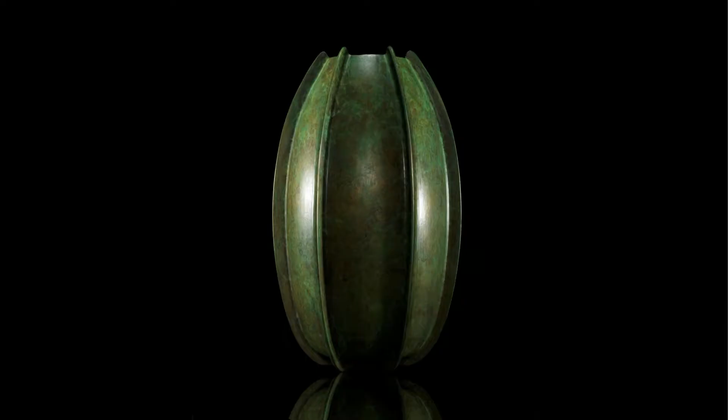This is also interesting, I did a series of these vases. This is cast in bronze. The original ones I did, the original piece was made out of wood and then it was used as a mold and it was cast. And then the next one has a twisted design. The ribs on it kind of spiral around it. And in that one, what was interesting was that I used a 3D print as the mold for casting. So my plastic became the lost wax.

Unfortunately, it was environmentally idiotic. I used ABS. My friend who runs the foundry was kind enough to do it just once and told me enough of this. And Bruce is going to talk more about it, we've collaborated on this for a number of years, and Bruce has taken it to an entirely different level. And I'm really excited about turning it into something that's really useful and environmentally friendly again.

And what's interesting about this range of work, all of the early work, including the boats, were all done in analog fashion. There's not a digital thing involved. There's no digital tools in the design, and there's certainly no digital tools in the fabrication. All the later ones go through this period of exploration of starting to use digital tools, and then things like the go-kart are this weird mix of analog and digital, which I think really is the future, where there is no real distinction, and a digital tool is just a tool.

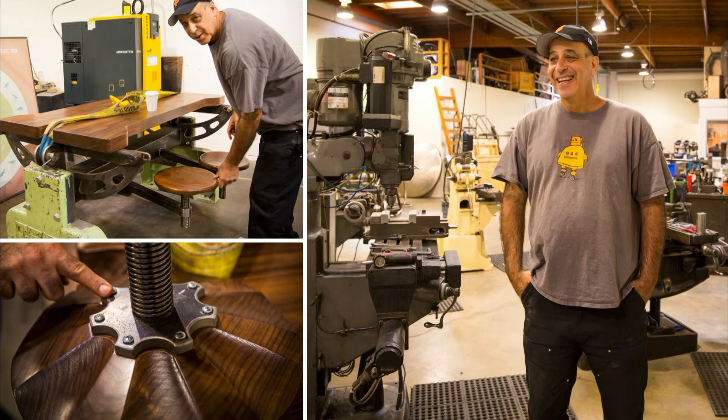So when I'm not being CEO, you can find me in one of my shops. This is my shop. This is the metal shop. I'm busy building shop furniture, which is just taking old machine castings and combining it with new stuff. There's nothing like building furniture with 1.5-inch Acme threads. I have not found a piece of furniture that would not benefit from a 1.5-inch Acme thread.

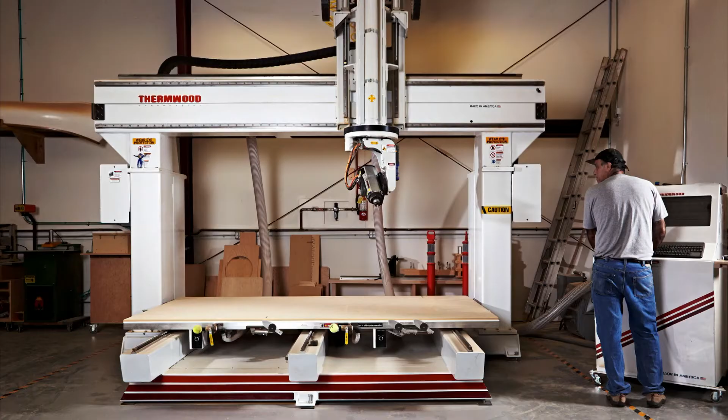And this is me in my wood shop along with my woodworking robot, who, unfortunately, I thought was going to save me tremendous amounts of time. There's two funny parts of it that are somewhat ironic. One is when you have one of these big machines that you think is going to save you all this time, the first thing you do is you stand in front of it all day long just watching it do work. So you go from actually doing work to just standing there, and then when it's actually done, you have a ton of stuff left to sand. So I thought it would save me work. It has created way more work for me than I ever imagined.

So let me move on to really what the theme of the conference is, with this background of what I like to make, which is all about capturing, computing, and creating. And let me show you some of the capture stuff. There's so many people today who have already done a great job, and many more over the next day and a half who describe this act of capture. But I chose 3 different examples that come from our customers and partners doing interesting and representative work in terms of capture. So here's the first one.

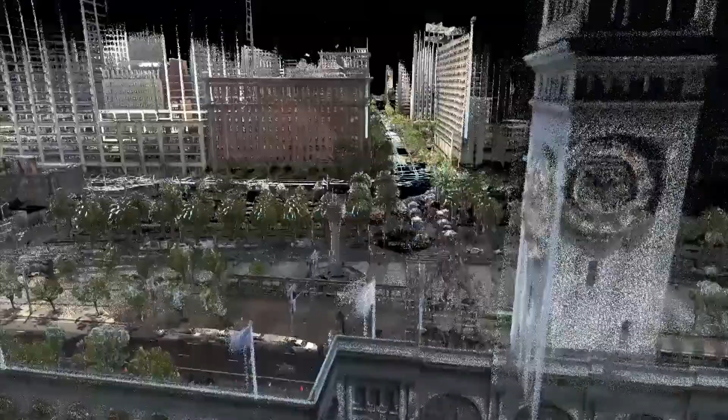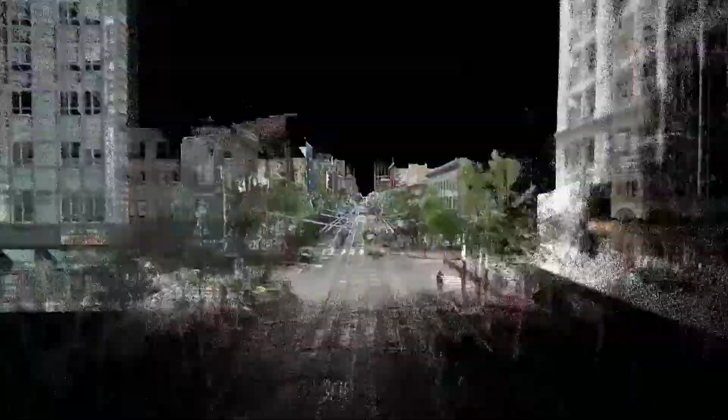So this is a capture of Market Street in San Francisco. I mean, from where we've come from, where we used to get thousands of points, tens of thousands of points, to be able to capture this, there's not a photograph in there, that is entirely a point cloud that's captured. And we're going to hear a little bit more about this project today. But I think it's kind of amazing. And in some ways, it speaks to this thing of we're going to be able to capture tremendous amounts of data. The real question is, what are we going to be able to do with all of this data?

Here's a second one that I think is really exciting. So this is Avatar. This is Jim Cameron making Avatar. What people may not realize about this is every bit of motion for the movie was captured. So this is the first feature-length movie in which every bit of motion was captured. And so it has a really different dynamic than what usually goes on in capture. Most of us are spending all of the time trying to capture the geometry and the topology of what we have. This one instead says, I already have the geometry and the topology. It's the 11-foot blue people. What I need to do is get realistic motion.

And so what they were able to do was capture everything, whether it was a horse, whether it was a person, or in many cases, really low tech, like the flying spaceships. They actually made them out of wireframes of hangers. And they just moved them around and took the motion of that and turned that into the movie. So a really interesting high-tech, low-tech combination.

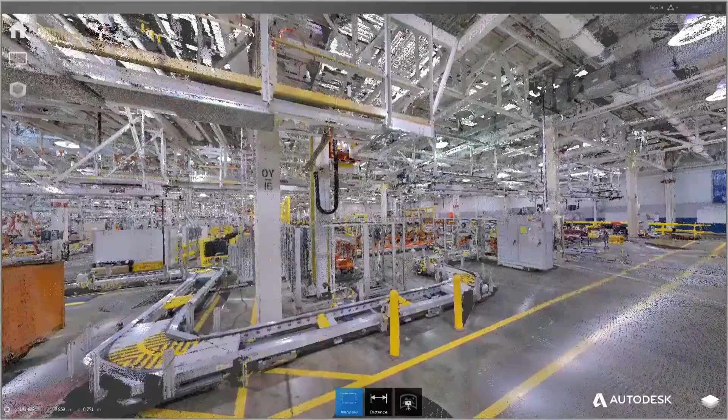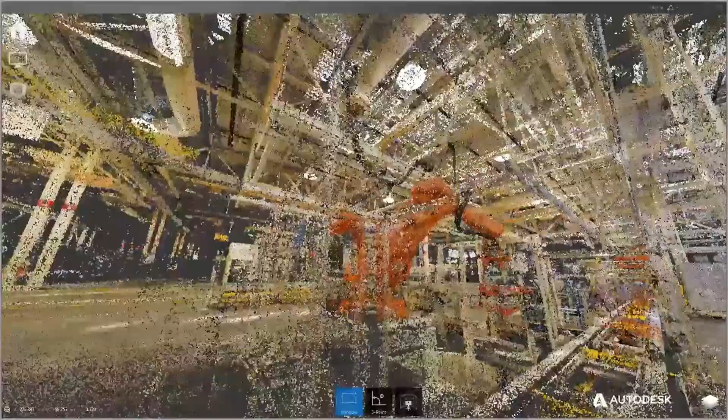Okay, we'll ignore that. Here's another example that you can see a lot of. This is a factory. So three different settings: one in terms of media and entertainment, one in terms of a factory, the other is the built environment. All really interesting places where there's a lot of data being captured, and we do have to figure out how to compute it.

And if you look at the Avatar one, that was the one that was most ready to plug and play in terms of they were able to turn it into a computable model. And I think that's really the important thing: how do you take this data and be able to compute on it? Just visualizing it is interesting. It's not enough. The other thing about it that I think is particularly interesting, it starts leading to this idea of different kinds of representations of the information inside the computer.

In many cases, we've historically worked with analytical surfaces. But as we start gathering point clouds, it's going to become more realistic. And discrete forms of data in terms of point clouds or meshes are going to become more reasonable. And in the end, we will be able to do many of the things that people think are unimaginable, like drive CNC tools, even off data like this that's actually discretized as opposed to continuous data.

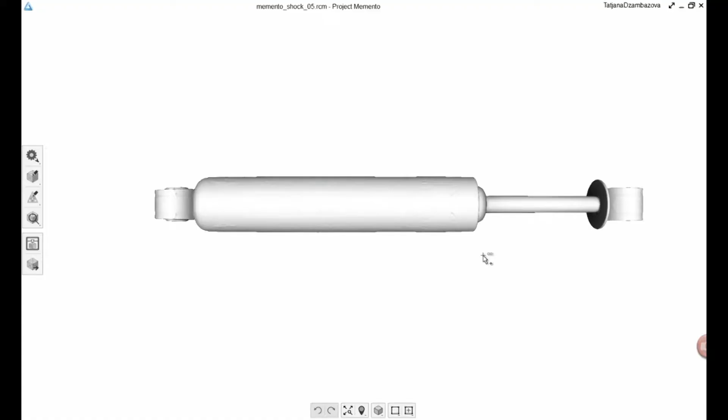Okay, so let's just look at the compute. So here's an example. This is a classic, I think Stuart talked about this this morning. Many people have fancy names for it. I still see it as reverse engineering. You have a part that already exists in the world. This is a new product that we just brought out called Fusion, a cloud-based CAD system. What was important about it is that you can start taking in data that already exists in the world, and you can bring in this data and transform it through different data representations.

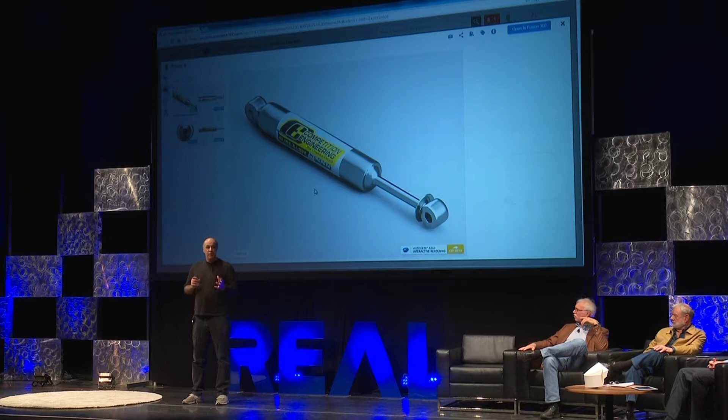So while people talked about, and Stuart did as well this morning, these workflows, I actually think the thing that's getting in the way of these tools being really useful is that the workflows are very much too painful. So while the point tools are good in and of themselves, the place where the pain enters the process is moving from one to the other. As he said, I moved it 11 times in an hour. My head hurts from the idea of moving between tools 11 times in an hour.

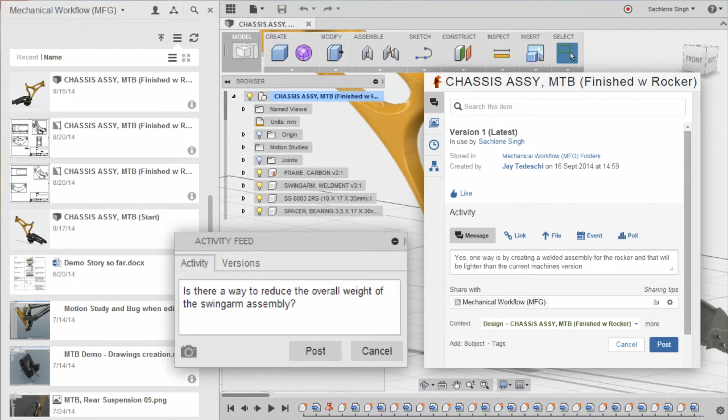And so we worked hard on trying to build a tool that is built around the idea of, I'm going to work together with other people. So two important considerations. One, I'm going to work with other people, we're going to collaborate, and I'm going to know what's going on. And the second thing is I can go all the way from ideation to fabrication in the tool. And here we show it runs on all kinds of Macs and PCs. But in the end you can take something that comes in as a point cloud and eventually fabricate it in a CAM tool.

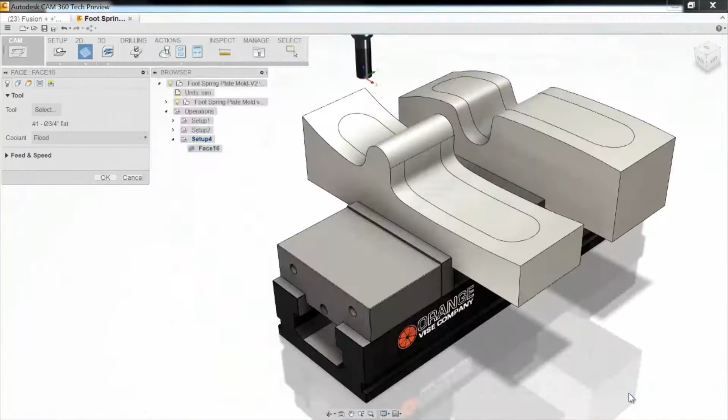And so we're really interested in trying to avoid these places where the data just kind of falls into a dark hole. And what bothers me most about it is the difficulty in going back and forth. And that idea of iteration seems so important to me in the way that you make things, that you need to do iteration all the time. And when the tools prevent it, I think it prevents you from making the best things possible.

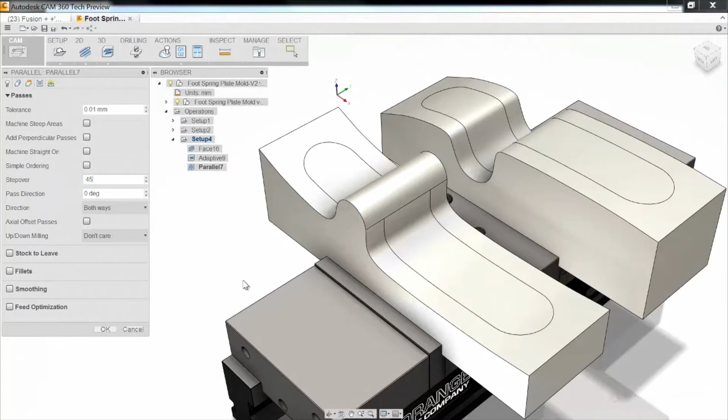Let me move on to one other thing that has me particularly interested, and this is this idea of generative design. And it's different than what we see going on in the world where we're going to capture something. This is a different idea which starts with the idea that computing is virtually free and virtually infinite. And if you had all the computing in the world, how would you design and engineer things differently? That was the starting point for what we were thinking here. And at first we said, let's just test exhaustively. And that certainly yielded some results.

But then we said, what we really want to be doing, because in the world of CAD, computer-aided design, I would say in the 30 years that CAD has existed, the computer has barely ever aided in the design of anything. It's true. It started 30 years ago, and we did 2D documentation. We agreed upon a convention, and I made a blueprint, and I transferred it to you. Today, we do the same thing with 3D models.

We document our ideas. We do not design in these tools. And the idea is we need to reach the place where these tools actually help us. So here's this idea of generative design.

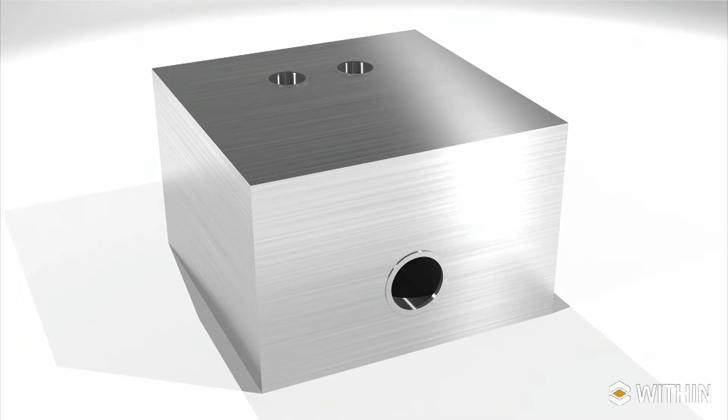So imagine we have something that fills a space envelope. And there are two fluids in it, and they're going to pass by each other, and there's thermodynamic requirements about exchanging heat. And all we're going to talk about is a high-level specification of what we want.

And now we're going to let the computer, and remember, we believe that computing is virtually free, so we're going to let it run for hours, thousands of hours, tens of thousands of hours. And there's the heat exchanger that the computer designed.

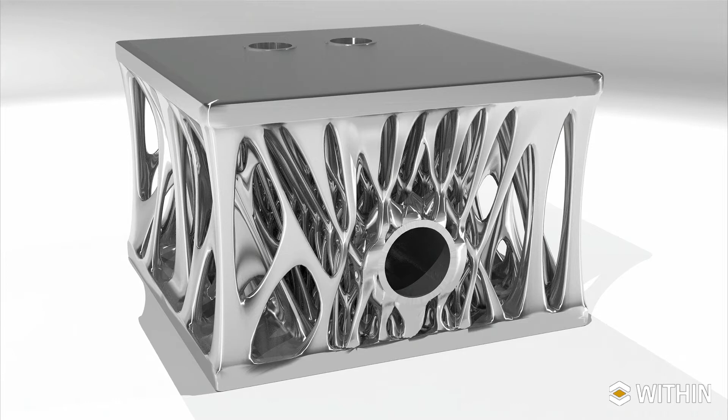So it's one of these interesting things. It makes a lot of designers, I'd say, almost angry, but I look at it as just another one of the tools. It's another technique that we have that will start getting at it. What's interesting about this design and several others like it, it explores the space in a way that guarantees you a near optimal solution.

As a matter of fact, we did another one for a part of an electric motorcycle. We were working on the swing arm, and we ran it through the same algorithm, and the result that comes out looks almost identical to a dog or a cat pelvis, except it has a hole on one side. And we say to ourselves, this has to be a bug in the algorithm. And it turns out, of course not.

Unlike a dog or a cat, the loading on a swing arm on a motorcycle is asymmetrical because the chain is on one side. And so it was interesting because when I went back and you go to Google and you look at the images of all the swing arms that have ever been designed for motorcycles, nobody ever picked up on this fact.

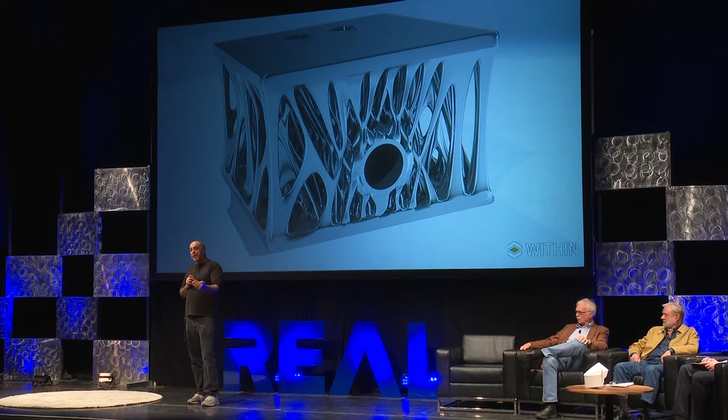So I think there are insights that we can learn, and we need to be a little less proud about letting computers start helping us design and engineer things better. Here's another example just like this.

This one is growing a structure, and this is for a hip cup. And the idea behind the hip cup was to make a structure in which the foam has pores that are pseudo-random in size. And the reason is that it's demonstrably better in terms of having the bone grow into it if it is pseudo-random as opposed to a regular structure.

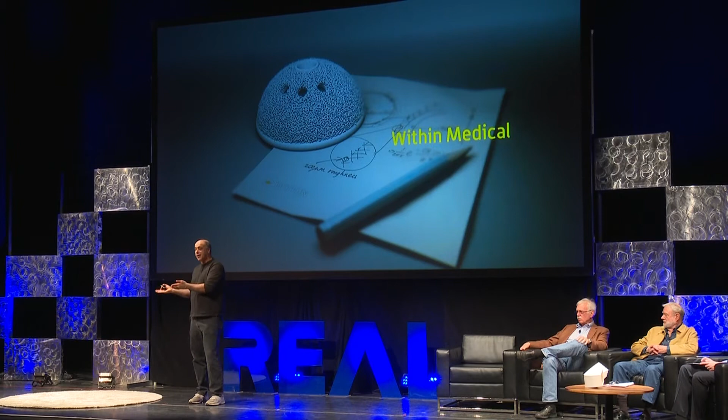The body recognizes that as real bone and grows into it much better than if it's a regular structure. So we worked with a customer on being able to do this. And really the interesting thing that comes up in stuff like this is because this one will be different for

everyone who gets one, all of a sudden you have to get the FDA not to approve a device, but the FDA has to approve an algorithm. And if you think it's hard getting the FDA to approve devices, getting them to approve algorithms is really hard.

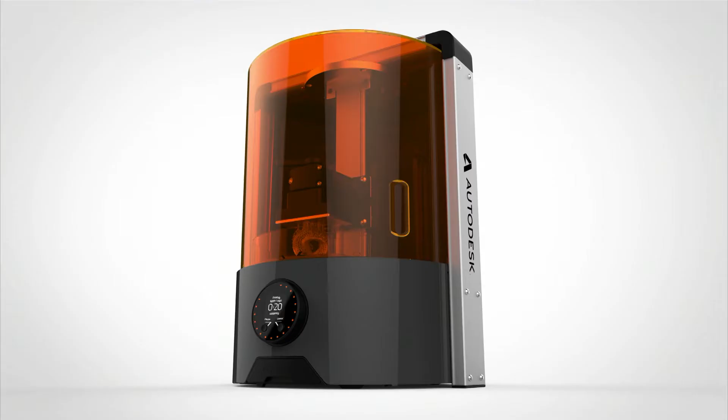Okay, so let's just move on to the next part, which is create. And one of the things we got interested in was 3D printing. And the genesis of it is really when you look at what we're doing with generative design. So if you think about it, why is Autodesk interested in 3D printing?

It's only because those shapes that are coming out of generative design are really difficult to fabricate in any other way. And I think we're on the verge of getting to the place where we will start being able to truly use additive manufacturing to be manufacturing, to make real products that go into the world.

This was our first attempt at a printer. This is just released. It's called the Ember. It's a relatively small scale but high resolution printer that we're selling. The important thing about Ember was that it has three ideas built into it.

One is an open software platform called Spark that we want others in the industry to use, and we're working with others to adopt. It's open hardware, in which we're publishing the design, and people can take the design and riff on it, build others or improve upon it, and we're hoping they do.

And the third one, unlike other 3D printer manufacturers, we are encouraging people to experiment with materials. We want people to put their own materials in so that we go forward in material science. So open hardware, open software, and open materials.

Let me skip that and move on to some other things in 3D printing. Two things that I'm particularly interested in 3D printing these days.

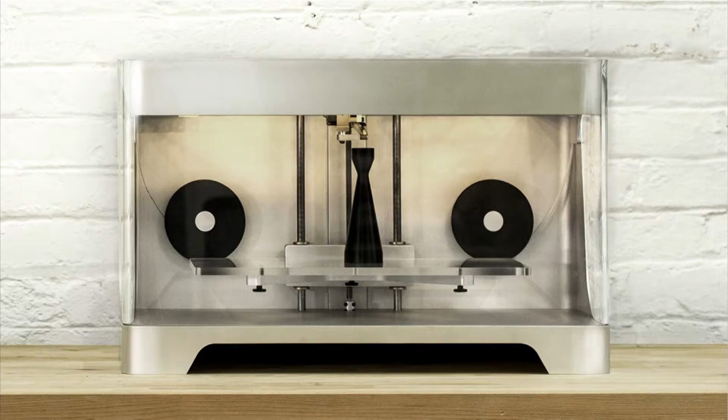We're seeing a new generation of machines. This is called the Markforged, but there's a whole series of them in which they are now taking plastic parts and putting in filament, so you have fiber reinforced plastics. This one does Kevlar and carbon fiber. And all of a sudden you're starting to turn those unusable plastic parts into truly manufactured goods.

So that one's interesting. Second one, there's another company I visited again yesterday. They are now printing plastic parts at about 100 to 150 times the speed of the standard SLA or FDM printers. So for the first time, you can actually see the print taking place before your eyes. So things that took 12 hours are taking 6 minutes. It's incredible when you're able to do that.

So I think we really are on the verge of really important stuff where these things will no longer be prototypes, but they will be used in real production. Let me show you some other stuff I'm interested in digital fabrication.

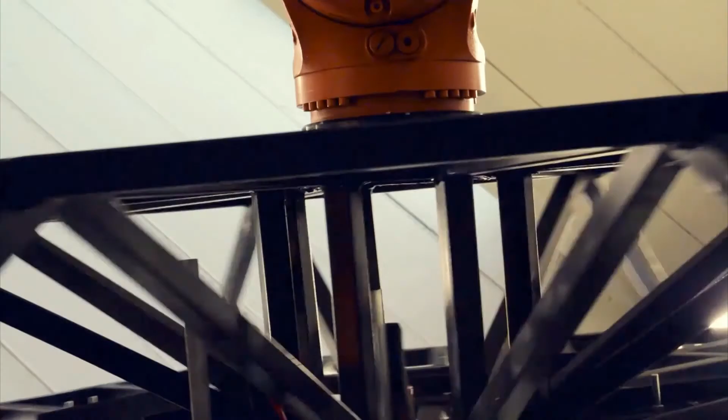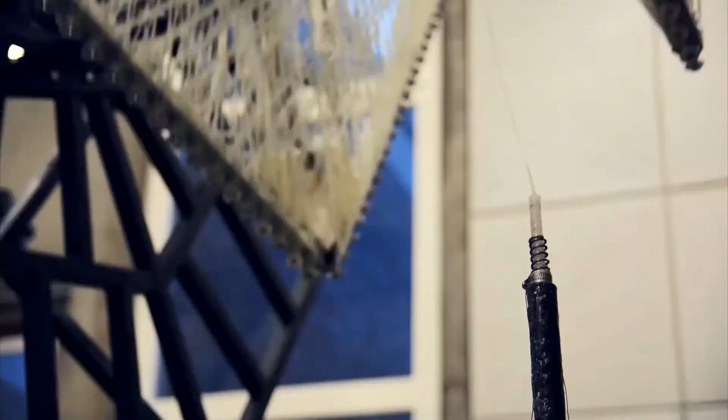This is some work going on at the University of Stuttgart. This is Achim Menges' work, in which he's using two highly coordinated industrial robots to do wet layup of things like carbon fiber.

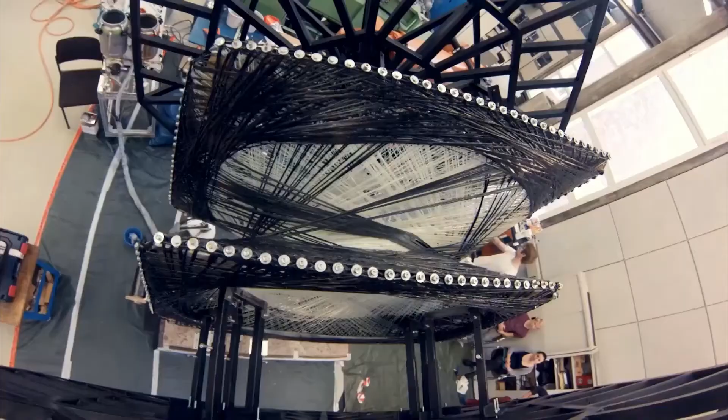I just love the choreography of this. We'll just watch it for a second. And there's the architectural size structure that's digitally fabricated. So I think this is amazing.

We're now getting to the place where we can start designing truly interesting things in the computer with its help and being able to fabricate them.

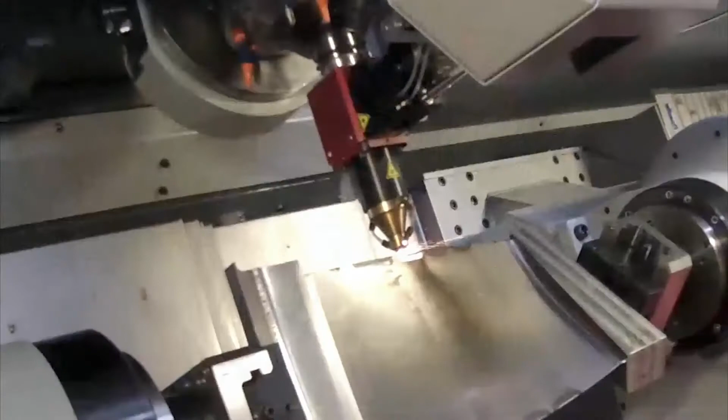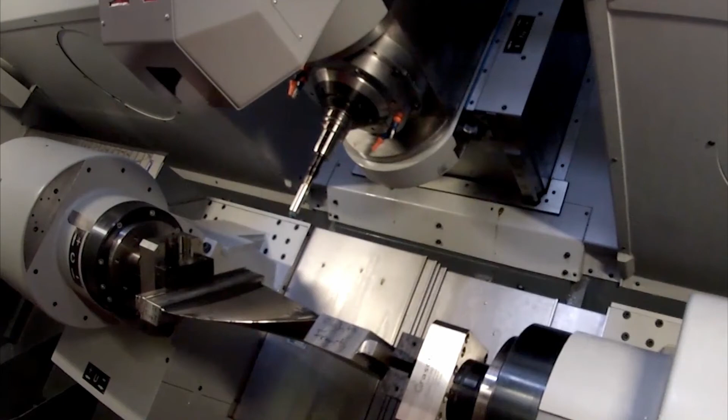Here's another technique I'm equally interested in. Again, for me, most of these things are not about being dogmatic, it's purely practical. I think there are huge advantages to additive manufacturing that I talked about, such as shape complexity being free, the efficiency of materials, but there's also the precision and surface finish that you get from subtractive. So what I like about this is the combination of additive and subtractive, where you really get the benefits of both.

So, how does this all come together? That's what we're here to talk about. It's the capture, compute, create. For me, the capture is the first part. It's really important, but if we can't get it into a computable form, it makes little sense.

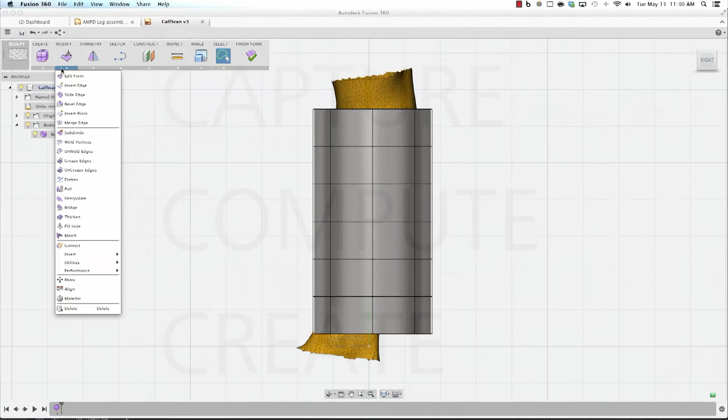I spent a lot of years in which we kind of abandoned people at that side of the screen with a computable model. What I'm most excited about is bringing it to the other side and being able to now fabricate these things. So just like Eythor said and the folks from UNYQ, here's an example of a story.

We bring in scan data for a prosthetic device. This was done by our friends at AMPD, a woman who had lost her leg in Afghanistan. That's the scan of it. She was an avid sports photographer, nature photographer, and wanted to get back to being able to do that.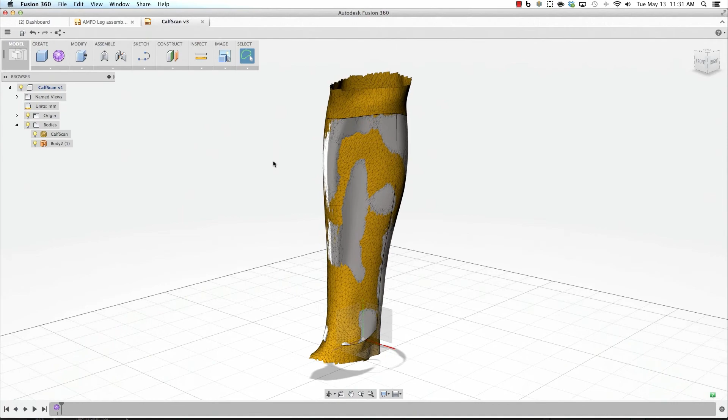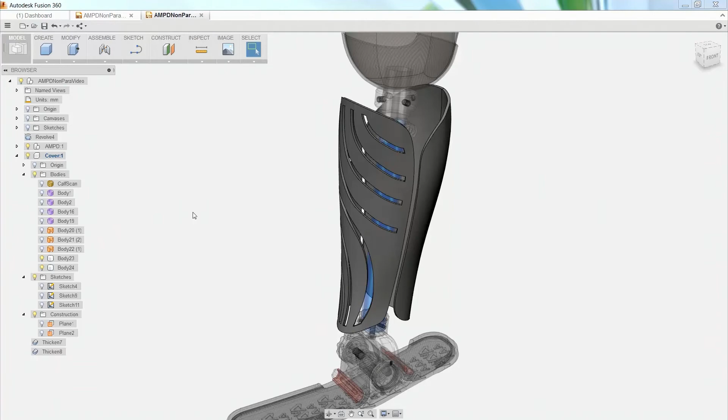This is stuff where it's brought into Fusion, turned into an analytical surface. Here you can see the shield being actually built. And it'll go all the way through fabrication. Here's a little bit of analysis on it.

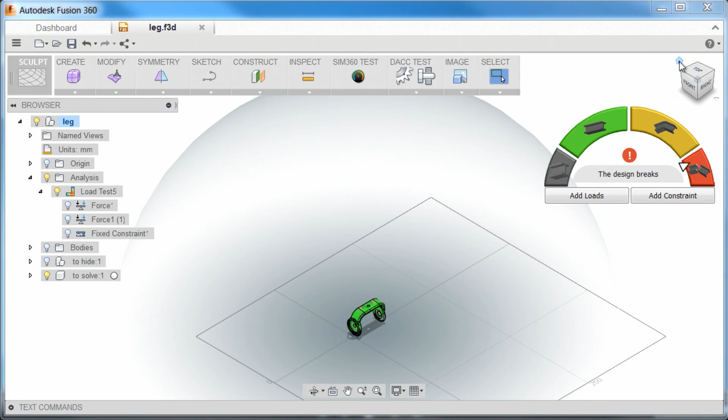So we can actually start to build digital prototypes, really understanding how this thing's going to perform. I'll move it along a little bit here, but you get the point. And there's the finished product.

So this is all being done in the cloud. This is a product that sells for $25 a month. And by the way, students, faculty, institutions around the world, it's free. Anyone who does this for hobby or nonprofit, it's also free.

So for $25 a month, we're starting to get things where we can scan data in the world, bring it in, model it, compute upon it, analyze it, and fabricate it all in one place, and visualize it just like that. So I think that this is kind of the future of how we're going to make things.

And it always strikes me as odd that people are doing this amazing building of these things for the future, but they're using 20-year-old tools to do it. So I feel that our obligation at Autodesk as tool makers is to bring the latest, greatest tools and do our small part in bringing the industry forward by really making these tools available to everybody.

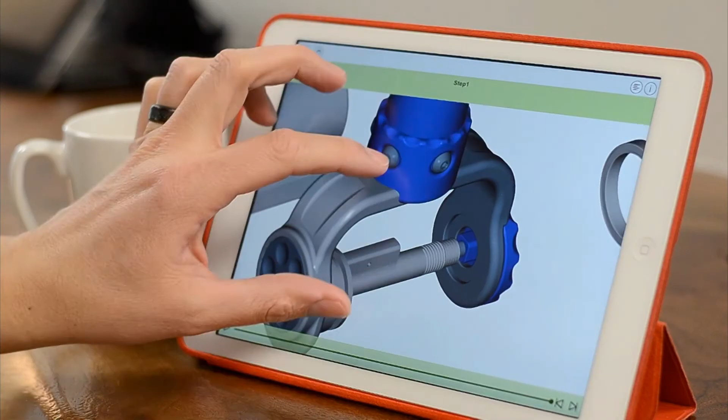And here it is, available on a mobile device. And there she is, being able to go off-road once again and be able to do nature photography. Thanks very much.